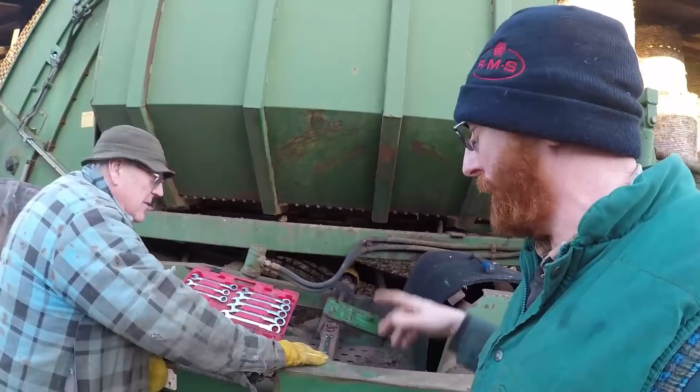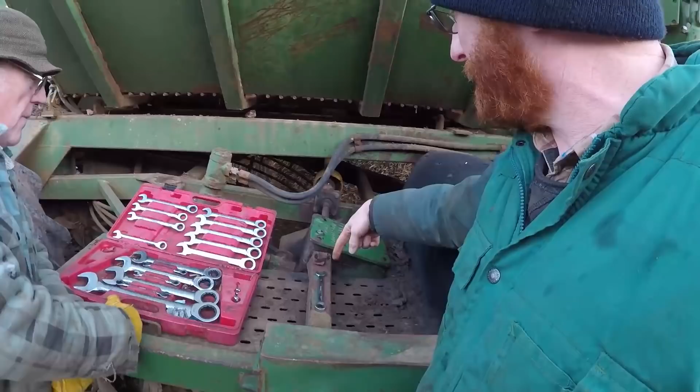So what we're going to do - when we were harvesting, or when we finished harvesting, it was on the last load. We were just about to pack up and the whole lot broke down.

So what happens: drive comes across from the shaft under there, drives this cleaning turbine. The drive carries on through the shaft here, drives a chain, which drives these like a flipper thing in here to flick the beet out of the lifting wheels onto the turbine.

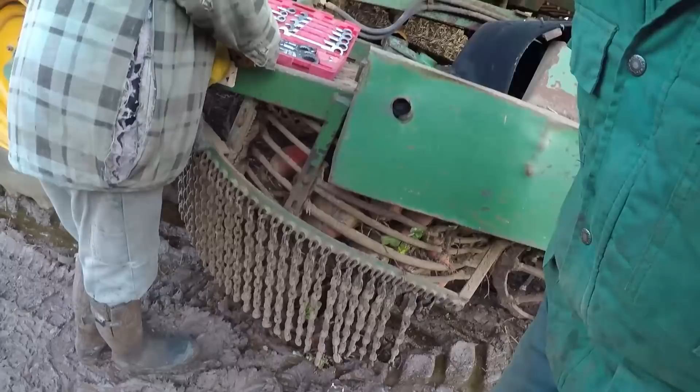When we finished, it's all blocked up, still blocked up now because we haven't unblocked it. These flipper wheels were still turning, but the turbine in here wasn't going round. So we know drive is coming through the gearbox, but we also know drive is not going down through the shaft to turn the old turbine.

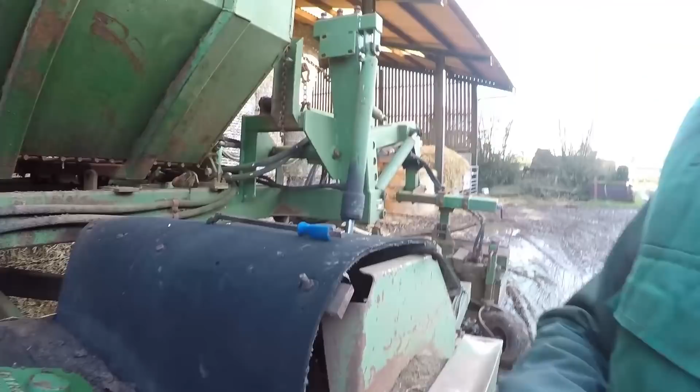So what we're going to do, take the lid off and see what's in there. Stick that there. I don't know if I can reach. Yeah.

Well, it ain't dry - that's oil. Why do we keep filling all out there? And that bolt - there we are.

Oh, there should be one over there. Is it a bolt or a...? Well, that's threaded. Whether he's... No, he's been bodged before. There's another sheared bolt in there. And there's a bit missing off of that worm.

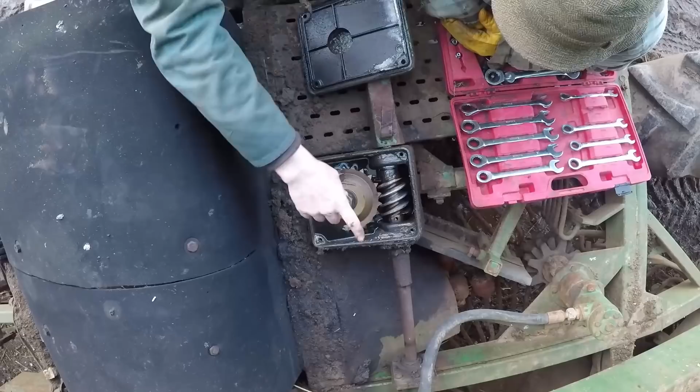That looks a bit chewed up, but I don't suppose it is. Why are you trying to turn it for? Well, let's see what happens, because obviously the shaft's turning through here. Oh, I see - I expect that's spinning on the shaft. If we can turn these flipper wheels, see if the shaft moves. Yeah, what, inside? Inside the worm? Yeah.

Well, it were, but the worm's stopping still now, isn't it? That's all mangled up on the end there, isn't it? See, put it on the bolt. That's it, that's it, yeah, spinning on the shaft. There's a hole that end as well. Yeah, we'll have to look at the book.

Because that's mangled up there, isn't it? A little bit - it's only scratched. Well, it's not going to stop it. Yeah, that's the side it drives. It only drives one side, doesn't it? It's always pushing that way.

Yeah, it looks better than I expected. Yeah, I thought this would be dry. So that's nothing to worry about, is it? Well, why do you keep putting so much oil in there? Well, because it do drop. But that's - you can see there he's broke.

He's been broke before, and somebody's put a... Is it a bolt then or a pin? I don't know. This is a pin? Bolt, but I don't know what that... No, it ain't hollow, I don't know what it was. You just have to go and read the book.

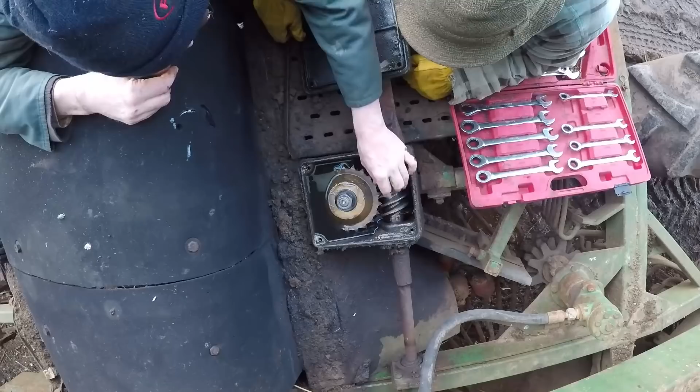As long as there ain't a stone or something - we jammed, just have to unblock it. Well, yeah, it's still bunged up at the moment, but that's the problem. Whatever, somebody has bodged that in, because that's original there, and somebody's put something down the side of it. What's the hole the other end? I don't know, can't see - it's not threaded.

I bet there's supposed to be two. Oh, let's have a look at the instructions. Well, we should go and look at the parts. But well, at least we know it ain't nothing major. Yeah, but why did it go? Well, because that probably ain't big enough. He's lasted long enough, so... Well, yeah, he's done...

Six years. It just goes right the way through, does it? Not just - what, the shaft? Yeah, don't know, it's not just. Well, it could be screwed down - two shafts coming in either side, but I don't expect so. I expect it's one right through.

Well, it's not a major disaster anyway. Well, as far as we can tell. Well, we can mend that easy enough. Yeah, we know we can, but why did it go? Is what I'm wondering.

Well, yeah, there could be a stone in there that caused it, or it could just be wear on a thing that's not really man enough for doing the job. I reckon it's a pin.

Go and read the book. Bring it out - so there we go. We seem to have diagnosed our problem.

It's not a major disaster. Reckon hopefully we can fix it fairly easily. It all depends on how much we've got to take apart.

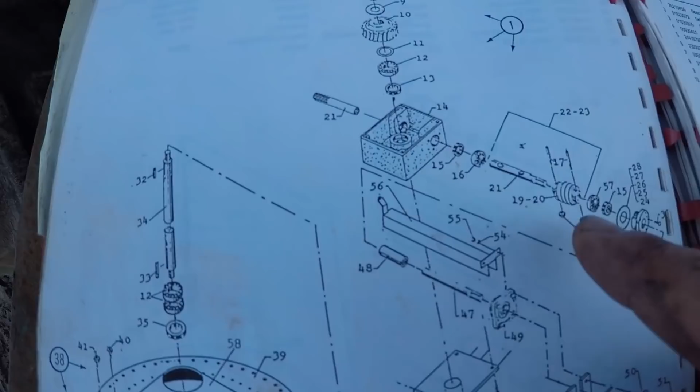Okay, so here is our parts book. So this is a gearbox. This here is the worm that we were just looking at, and number 17, if you can see over here...

Number 17, and amongst all the Dutch writing or whatever it comes from: conical pin and a nut. So that's what we've got here.

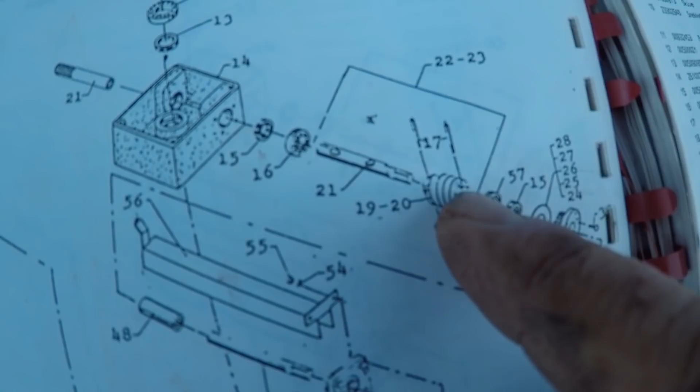So we could see the empty hole this side, and I said it looked like a bodge job, and there was an M8 bolt put through. So what we've got to do, somehow get it apart. I think this end one was broken off looking at it, and get that M8 bolt out, and attempt the repair. So there we go, we have discovered our problem.

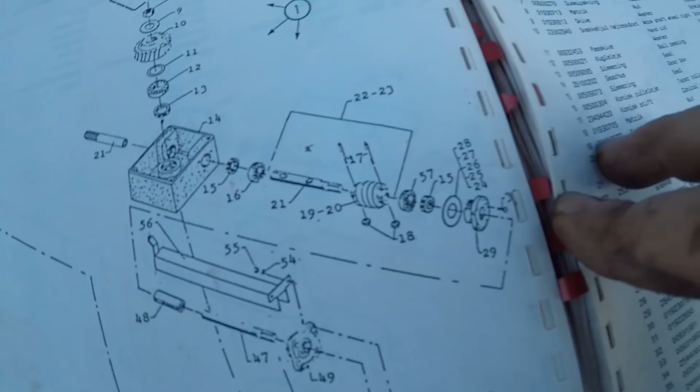Kind of formulated plan A for repair. How far plan A goes, we might end up on plan B or C yet, you never know. So what we've got to do, first thing, get it near the workshop. It's nowhere near at the minute and just too far away to carry stuff. Make a start on seeing what we've got to do to get it all apart, because that worm, I reckon it's going to have to come out of there to get that broken pin out of this side,

and potentially underneath that big gear there could be some other bits broken off in the past that may be hiding under there. So we've got to get all that out, make sure there isn't any bits of metal in there, because if, say, a nut gets picked up on that worm, traps between the worm and the wheel, and tries to go in the teeth, that makes a mess. So we're going to make sure that doesn't happen.

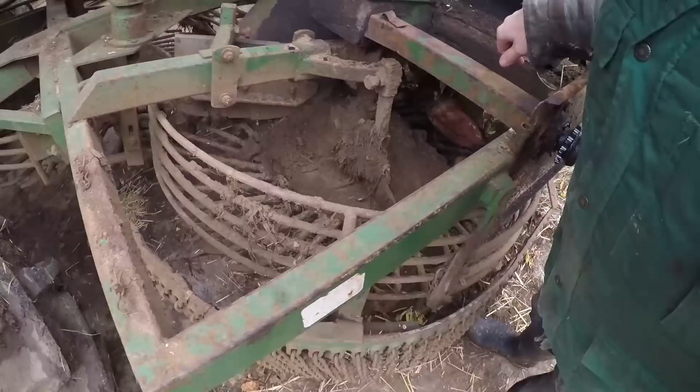So right, we're going to leave it for today and come back another day when we're starting the strip down. Right, so time has moved on a couple of weeks since we did our little reveal. So we're now relocated by the workshop. We have got all the beet out. Oh, there's one still in there. So we cleared the blockage, took this cover off, took the chain off.

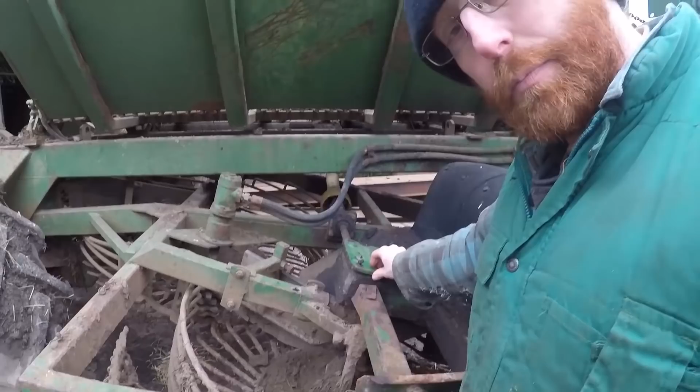So what we've got to do now, pull this bearing off. That will then come back, and after that we're going to make it up as we go along, because I don't really know what we're doing, but we're gonna do it anyway.

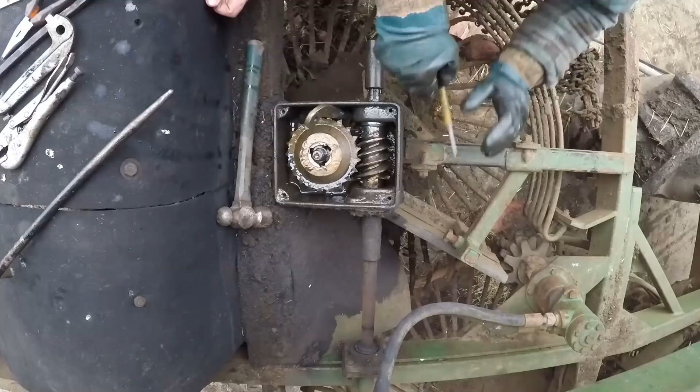Right, so what we found in here is not pretty. These three keyways are worn, seriously worn. There is some on the end of the screwdriver, some metal bits that have fallen out from somewhere. On the edge of this, all around the edge, is very, very sharp where it's been running against the worm. I did have that all lined up to try and tap that out. Bits come out. There's another bit floating in the bottom there.

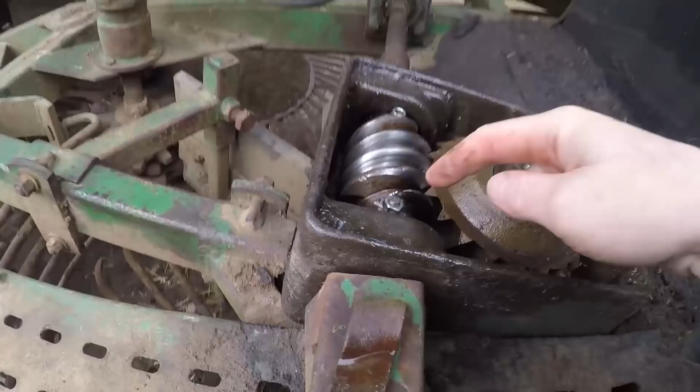Okay, so we have done a kind of a half repair. So you remember when we took it apart, this was the only pin through. What we've decided to do in the long run, so this shaft here is worn. This big gear is worn in the centre. We saw the splines all chewed up. The worm will probably go again. For the amount we use, we're going to reuse that. But this really, in the long term, this needs to be replaced.

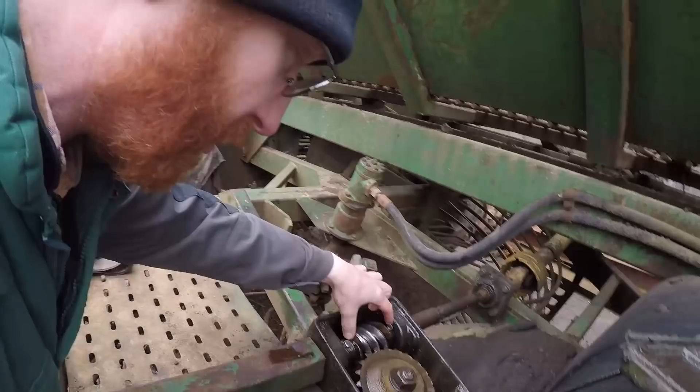But as things are at the minute, we're not in any big hurry to go spending out potentially several hundreds of pounds, because that doesn't look cheap. That's not a cheap gear there, and that shaft. So we're going to take a chance, and these are just bolts. Just put in some M8 standard bolts and take a chance. So the last little bit we've got to do, rather than spending out all this money, we've only got probably an acre and a half left to harvest. That will do it for sure. We're confident that will last out. Whether these bolts will is a bit of an unknown.

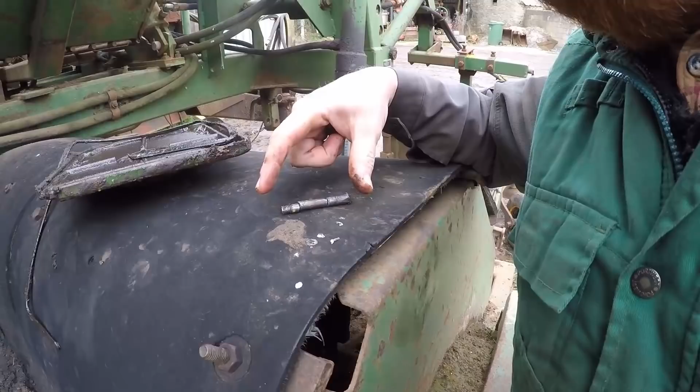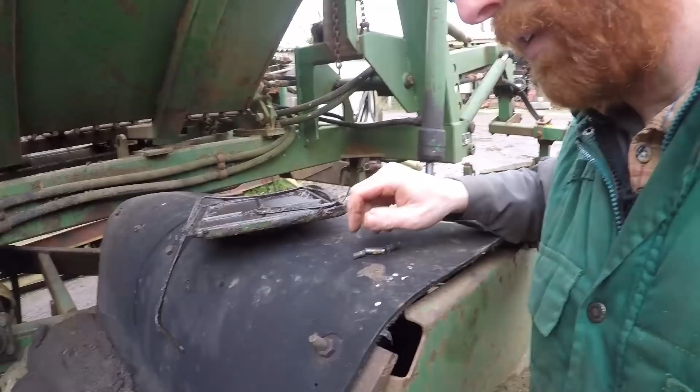But this is what we fished out at the bottom. So this is what should be in there. Two of these should be in there. But we've never opened this gearbox before. And earlier in the video I could see these bits floating around, and this is all we've pulled out. So I'm fairly confident that since we've owned this machine, it's always been running on one pin, which admittedly is probably harder than the bolts we've put in, but we're going to chance it for the rest of this season, hoping that them two bolts are going to finish off, just so that we haven't got to spend out.

I mean, these machines are still available. There is a UK importer, so I'm pretty sure we're going to get these parts. I'm pretty sure they're going to be available, just not at the moment. We're just not in a position at the minute to be prepared to spend out the kind of money that these are going to cost. So we're going to chance a pair of bolts. Hopefully it'll work.

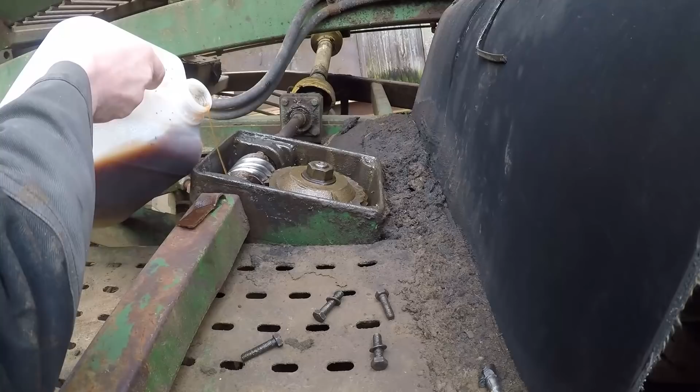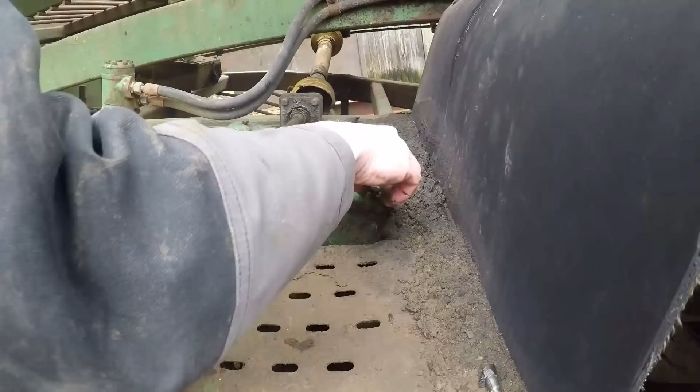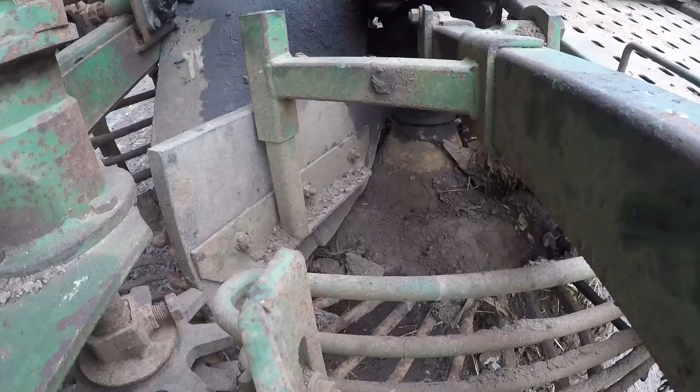So there we are, filled it with oil, lid back on. And you can probably hear we're hitching on at the same time, multitasking. So we're going to go and lift some beet. Assuming it works. I reckon it will. We're going to find out anyway, aren't we? So there we go. It's all turning around. All we've got to do now is go and harvest some beet.